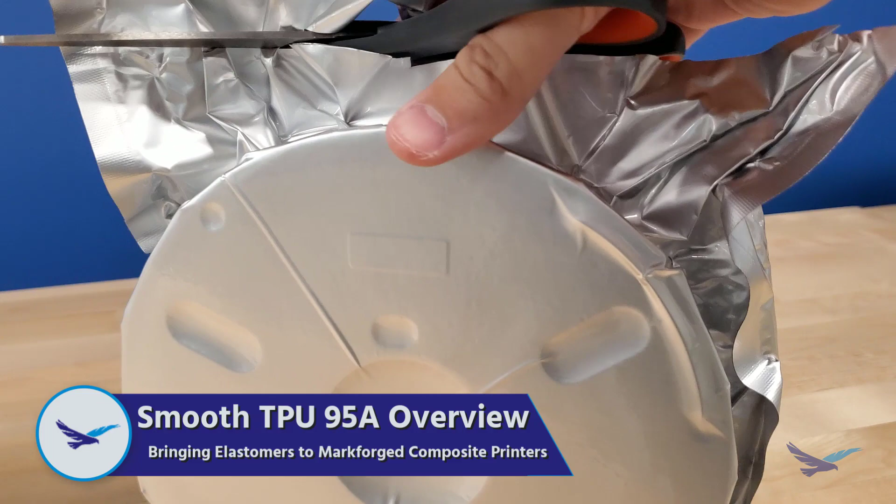In today's video we'll be taking a look at the newly released Markforged material, called Smooth TPU 95A. Smooth TPU is the very first elastomer added to the Markforged material library, and it is a great option for users who need flexible and resistant prototypes or end-use parts.

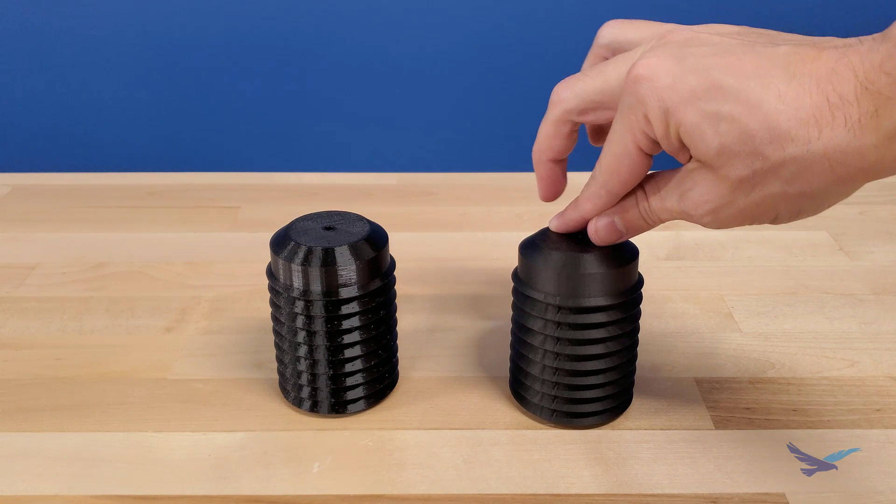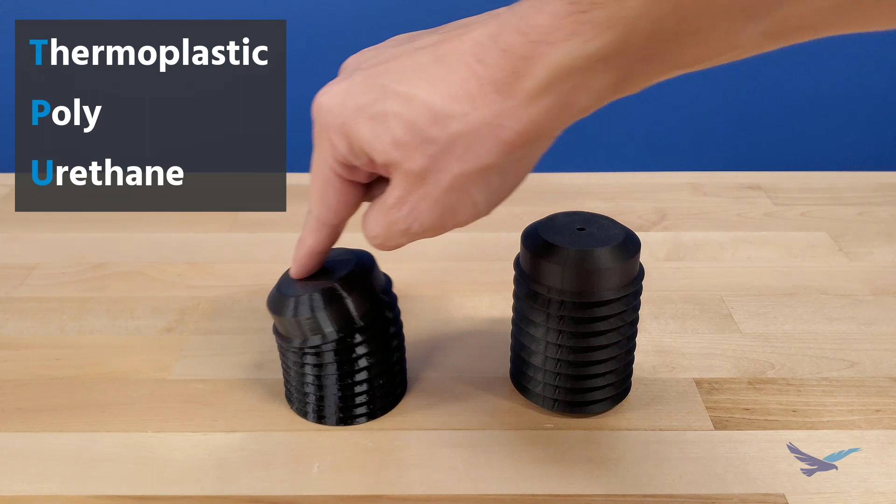To start us off today, we'll first go over a few properties of the Smooth TPU 95A material and what makes it unique. At its core, TPU stands for thermoplastic polyurethane, which is a category of plastics known to have good flexibility and elasticity.

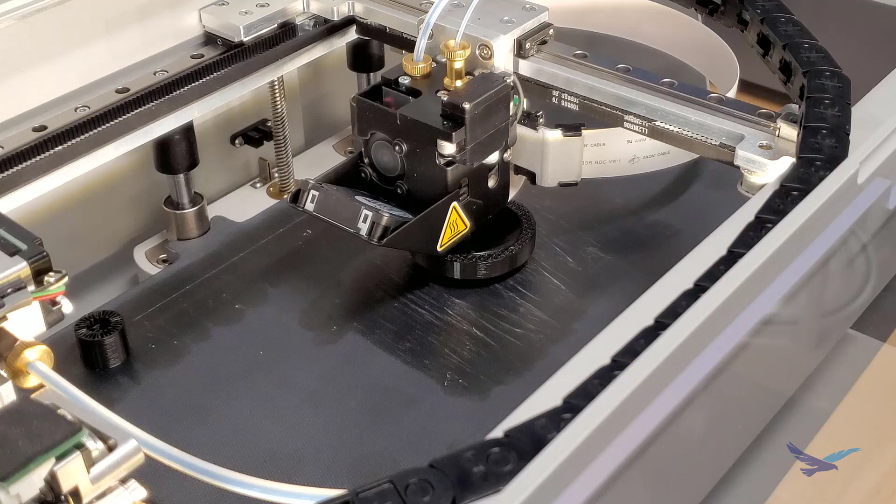Traditionally, materials like this can be difficult to print on an extrusion-based printing system precisely because of its flexibility compared to more rigid plastics. But the Markforged Smooth TPU is able to print better than other elastomers due to where it sits on the durometer Shore hardness scale.

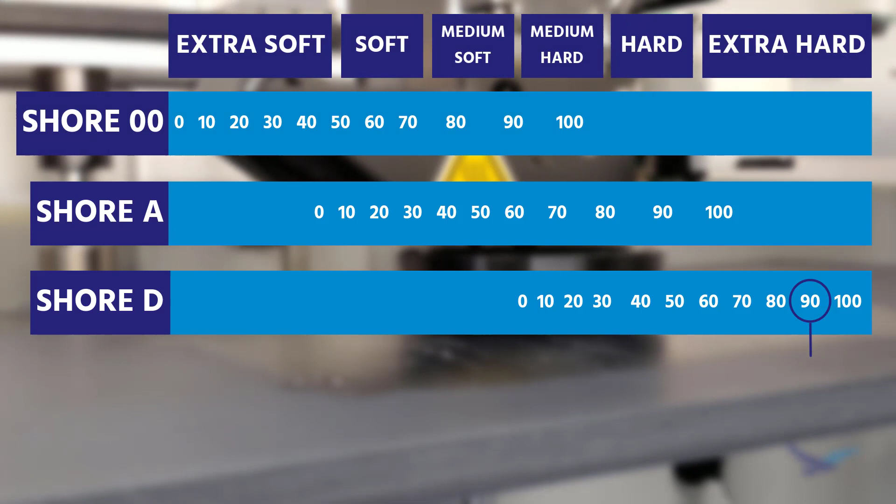In the world of manufacturing, the Shore scales are typically used as common points of reference for elastomers. Each Shore scale covers a wide range of hardness and has overlap with the other existing scales, but in general, Shore 00 covers the softer set of materials, with Shore A and D covering materials that increase in rigidity until reaching something such as a bone near the end of Shore D.

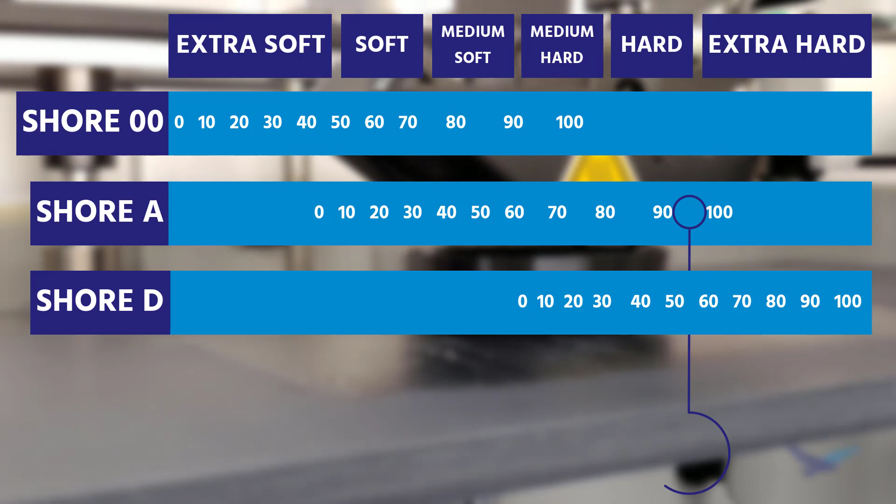As you have probably guessed by now, Smooth TPU has a durometer hardness of 95A, putting it near the end of the Shore A scale.

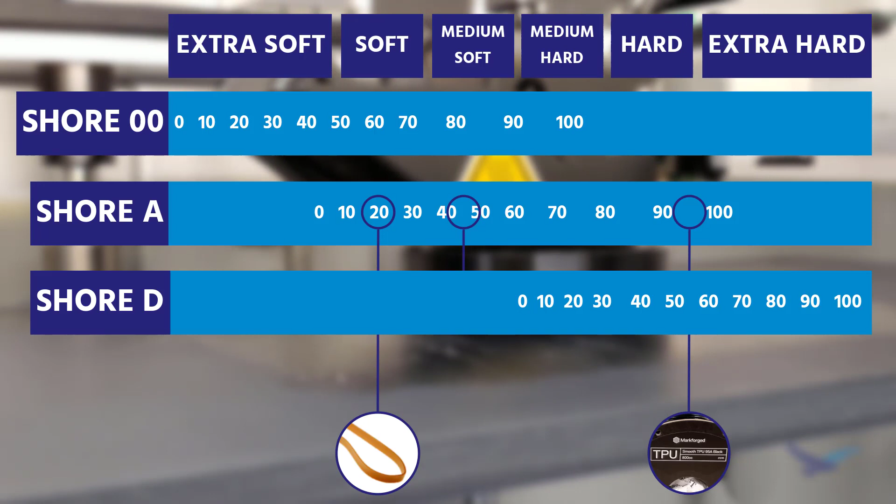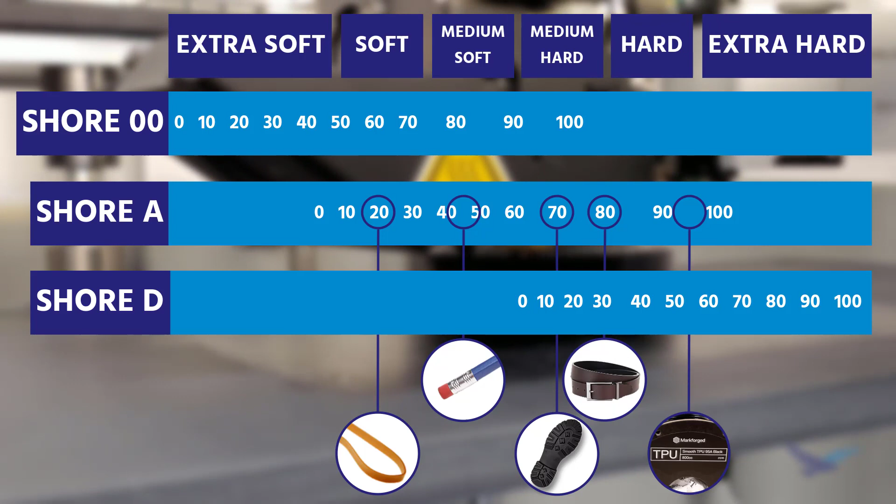Just for a frame of reference, a rubber band sits at about 20A hardness, with other typical examples being things like an eraser at around 45A, a shoe sole sitting at around 70A, and a leather belt usually being around 80A. A 95A hardness material will usually be fairly rigid, with a typical example being something like a shopping cart wheel.

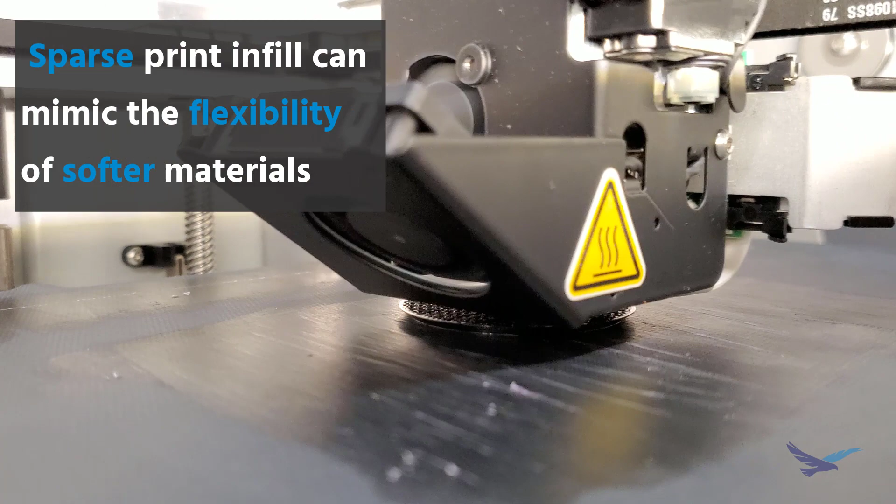That being the case, 3D printing allows for the unique possibility of creating parts with partially hollow interiors, which can create unique part properties.

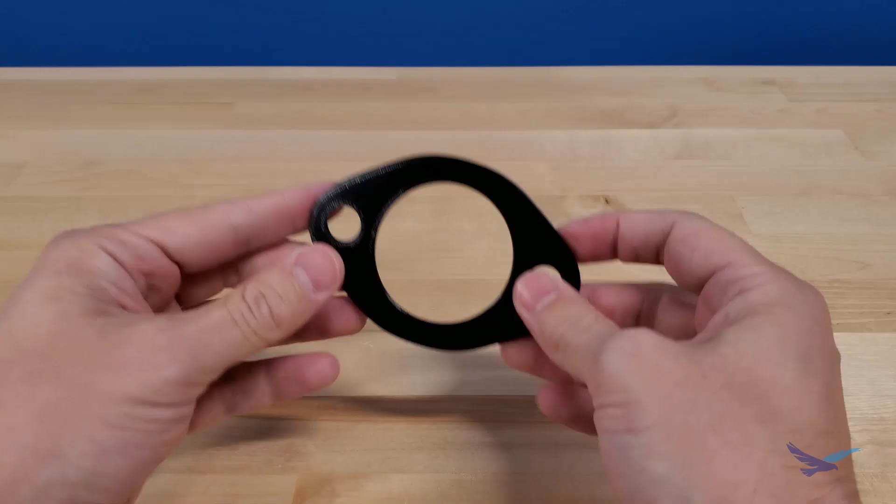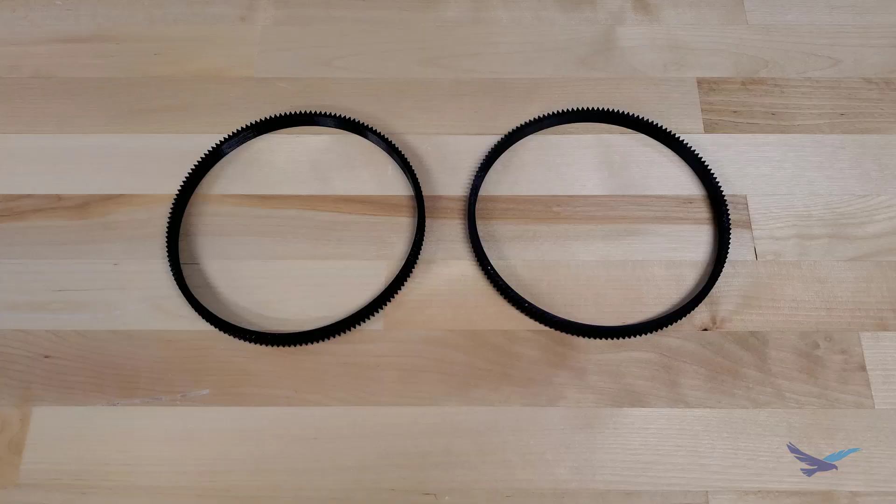While again 95A can be fairly rigid, decreasing the print infill percentage lets users manufacture parts that can have more rubber-like behavior. So you're not necessarily stuck with a shopping cart wheel consistency, which makes Smooth TPU 95A great for applications such as protective covers, gaskets, and even things like serpentine or drive belts.